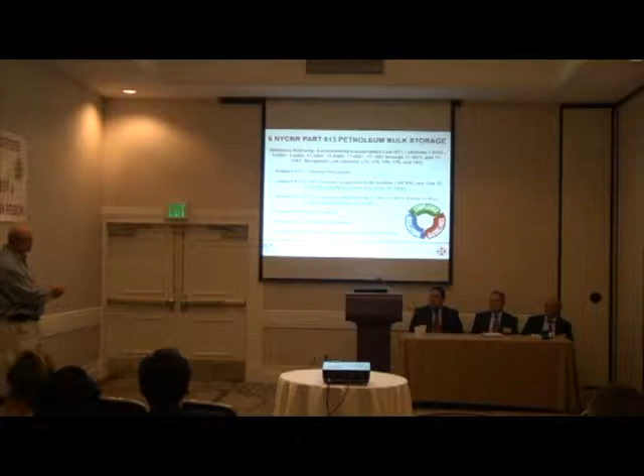The new underground tank regulations, okay, as well as above ground tanks. If you have USTs, whether it's down in a basement or something - I know a lot of you folks are real estate and building owners on a commercial level, so most of what you're dealing with is probably fuel oil. That would be covered under subpart 3, underground storage tanks, subject only to Title 10 of the Environmental Conservation Law. That's New York State law, which oversees the underground heating oil tanks. And then if you have underground storage tank systems, USTs, motor fuels, things like that.

How many people in here have fuel oil tanks? A couple people, I'm sure all you guys do.

So let's talk about some of the problems that you may have with underground tanks. I want to open it up to get some participation. Yes, sir.

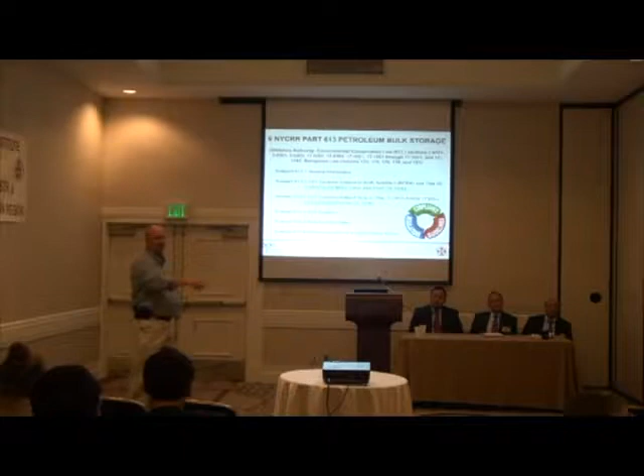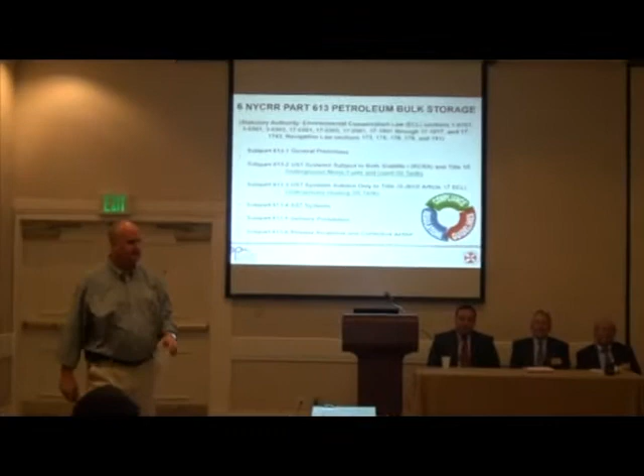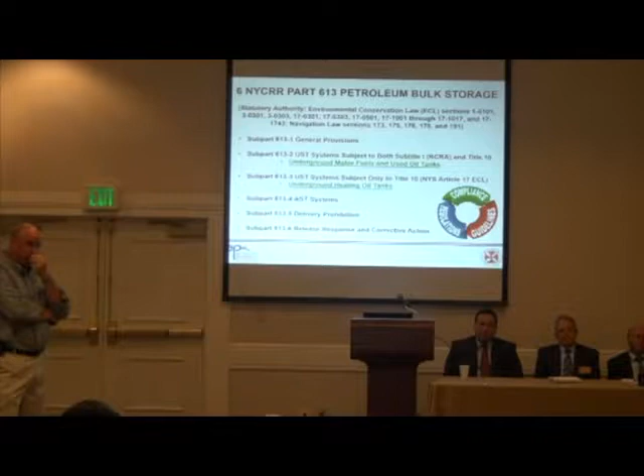I had 1,000 gallons in storage. It was there when I bought my home. I had it taken out of the ground, put in an above ground storage tank in my basement. And when they took it out, they found pitting, and the company that took it out filed a spill report with the county.

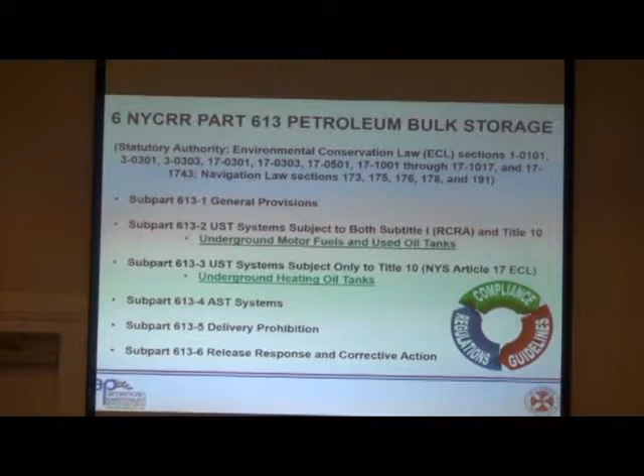Then I had my insurance company come in, and they did all this testing, which was far more extensive than the company that pulled it out. They refuted the company that pulled the tank out, and the insurance company said there's no pollution or contamination here that's significant. They closed the spill report.

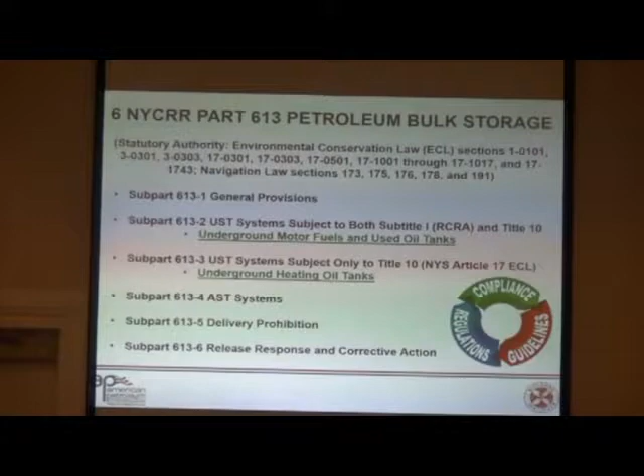It was just so frustrating. But it cost you a lot of money. Well, that was fortunately the insurance company that had to take care of it, because they were concerned about the liability they would get. But it made me feel like some companies pull these things out just to file spill reports so they can get work.

Well, yeah, there are what we like to call bad actors in the industry, and I like to think that we're not bad actors. It wasn't your company - well, better not be. No, I understand, I've heard horror stories. We've been called in to help folks that have had problems with other companies. I'm not going to throw stones at the competition, but there are good companies, and there are, I guess, less than ethical companies that want to create work. Typically, we don't operate this way.

Anybody else have any horror stories? I'll share a few. I recently had one up in Woodstock, New York, up in the beautiful Catskills. Again, it was a homeowner - I'll put some fear into the fuel oil delivery folks here. An above-ground storage tank in a basement was overfilled, and the fuel kept shooting out the vent.

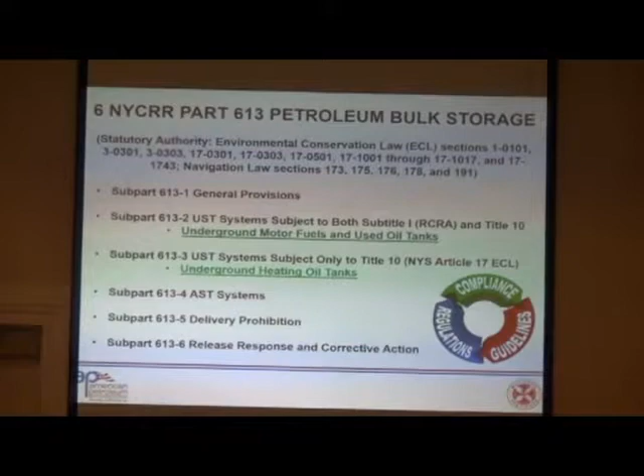Every tank has a fill and a vent, because when you're filling the tank, the air needs to get out to let the fuel go in. The vent was situated right above their drinking water well, so it came shooting out. Obviously poor design to begin with, but the well filled up with oil.

One Saturday morning, I got a frantic call from the homeowner saying that there was fuel oil coming out of her shower head. We immediately went and took care of the issue, closed out the spill with the DEC, and cleaned up the environment. That's one of many, but there are all kinds of horror stories.

I'm dealing with a spill right now in Saugerties, New York, at a retail gasoline facility, where they were not paying attention to their tanks.

The bedrock was very shallow there. They had a line leak and didn't do anything about it. At the gas station, you typically have what's called a pressurized system, with a submersible pump. The lines are always pressurized, so if they leak and you're not paying attention, it's just going to spray that gasoline out all the time.

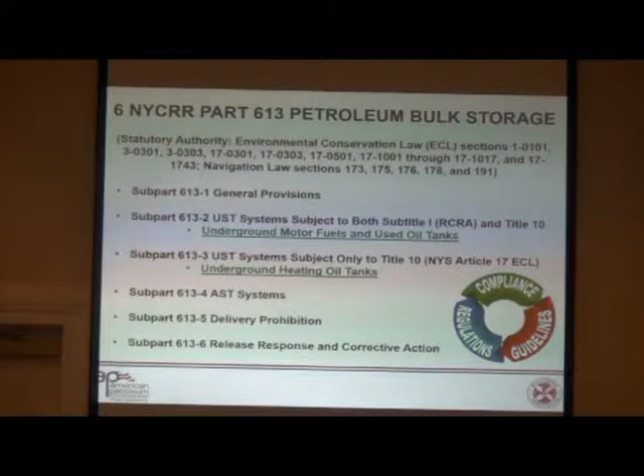It got into the bedrock and contaminated three drinking water wells, two of which are associated with the Comfort Inn hotel. So you had people checking in, going to their room, and they had gasoline in their water, in their shower, and everything else. Those are just a couple examples of what can happen if you don't pay attention to your fuel tanks. Fuel has to stay in the tanks.

I can share a story. The story is interesting because it covers a bunch of items. I managed a property, a large property. Sitting in the office, I get a call: DEC detected a leak. There were people working about a mile away, doing some work in the river, and somehow they traced oil in the water up to this property.

So we immediately called the company to come in and look at it. The building was built in the 50s, and we knew these were original tanks. We constantly took readings, and there was no reason to believe there was any leak. We never registered them, but did all the tests, everything we were supposed to do.

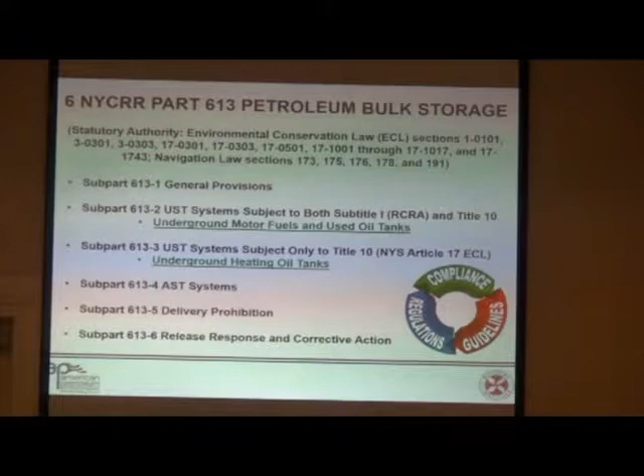We dug out the tank, and it happened to be in bedrock. There was more oil than you could possibly imagine. It seeped into the bedrock, seeped into the ground. We took the tank out, and it was all pinhole leaks. What was determined, even before I was managing the property, was that this tank—a 5,000 or 10,000 gallon tank—was probably leaking for 20 to 30 years. A slow drip.

I don't want to get into all the costs involved and what was involved, but the moral of the story is you can't always trust the readings.

Say now all the tanks are new and they're interstitial. Yeah, I'll explain that—that's a great point. Any tank under the new regulations, actually the previous set of regulations. Backing up a little, DEC really didn't exist until the mid-1980s, and the original set of underground storage tank regulations came out effective December 27th of 1986.

If you install a tank underground in New York now, it has to be double walled. It can't be a single wall tank. You can have a single wall tank, but you have to have a liner or some type of secondary containment underneath it. So any tank you put in the ground now has to be double walled.

Let's talk about regulated tanks versus unregulated tanks. If your tank is less than 1,100 gallons, typically it's not regulated unless it's something weird like waste oil. That's usually the cutoff for having to have a registered facility. I've had homeowners come to me with a 2,000-gallon fuel oil tank, and I asked if it's registered—they have no idea.

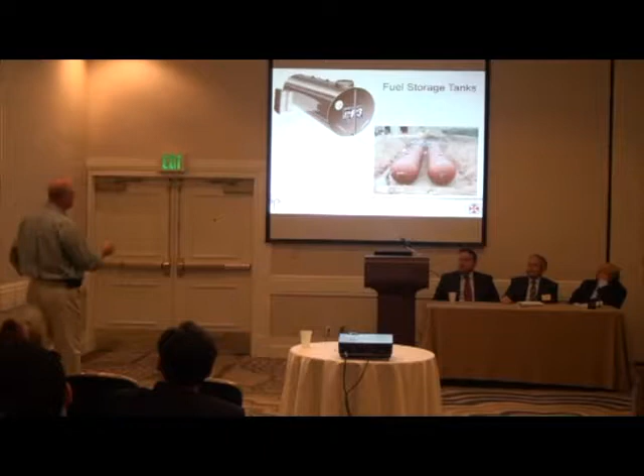But if you notice on the tank, they have these—they're called sacrificial anodes. The tank is cathodically protected. What happens is you put an electrically active metal like magnesium on the tank, and because it's more electrically active, that will tend to rust and rot away over many, many years. Typically they'll warranty a tank like that for 30 years. So over that time, these little hunks of magnesium, these sacrificial anodes, rot away and protect the shell of the tank so it doesn't rust.

Plus you have a double wall, and inside—I'll show you an example of what we do—it's called interstitial leak detection on double-walled underground tanks. But again, fiberglass tanks are generally state-of-the-art now. That's what people typically do.

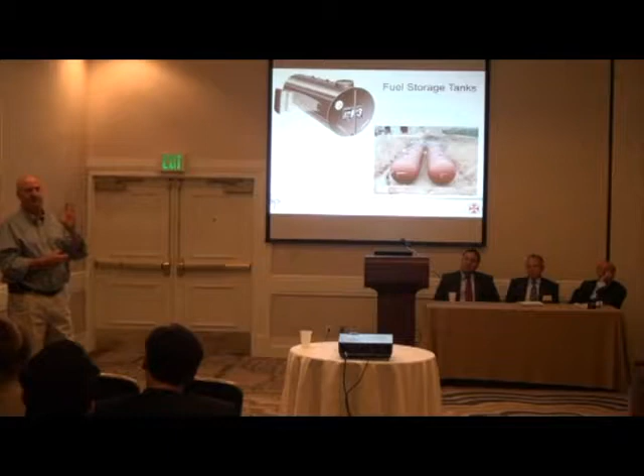So they're state-of-the-art fiberglass? Absolutely. Stainless steel? No. Underground for fuel and petroleum products, the big manufacturers are—these are Xerxes. You can tell by looking—let me go back here—these are Containment Solutions, those are fiberglass tanks as well.

And some of these you can actually get triple wall tanks now. So you can tell the manufacturer just by looking at the color of the tank. Actually, Containment Solutions makes green fiberglass tanks—the green ones are Canadian, made in Canada. These happen to be made in the US. The Xerxes are a red fiberglass. But yes, fiberglass is state-of-the-art now.

Fiberglass tanks, fiberglass piping, flexible piping—we install a lot of that. It's easier to install, the fittings are easier to deal with, and you don't have to be precise on your angles. It makes it easier for the guys when they install. But that's a great question.

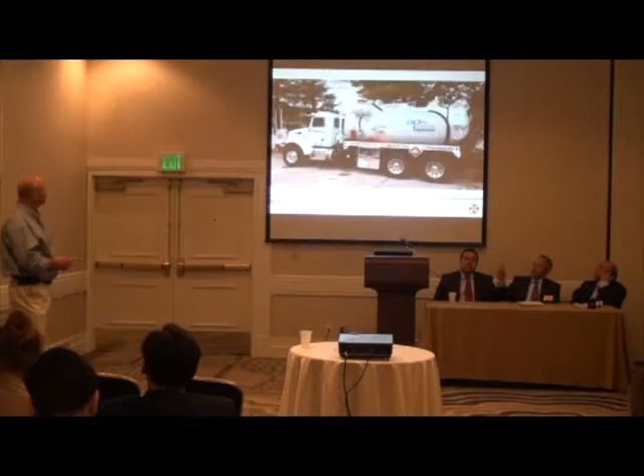That's, Michael, one of the things I think we run into quite a bit—there are a lot of tanks in Westchester County, in buildings built probably in the late 50s, early 60s, underground, that are burning 6-oil. And with the decline in 6-oil, these were very unregulated underground storage tanks—you really didn't have to pressure test them.

And now you're seeing where people are converting and are going to be forced to convert to 2 oil very shortly. And the problem that people are going to have is those tanks probably shouldn't be holding number 2 fuel oil. Right, yeah. And the difference between 6 and 2, people want to know what that is.

6 oil is much more viscous, it's thicker. It's almost sludge. Right, so if it leaks, and asphalt and emulsion products and things like that, they're not as heavily regulated because if the stuff leaks out of the tank, it's not going to go very far. Okay, but that's a great point, absolutely.

And the other factor is, anyone here from Westchester County Department of Health? Can we shut the camera off now? No. You're safe. We're safe.

Having dealt with them on numerous occasions, they're very strong in policing oil tanks. I was going to use the term militant. Militant is another word. And they run a court, basically, where they'll find a violation almost anywhere, quite honestly. Whether you have a super who's not keeping his logs properly, you have to follow all the regulations. If your fill port paint has faded over the winter, that's a problem. If the signage is not 100% correct, that's a problem.

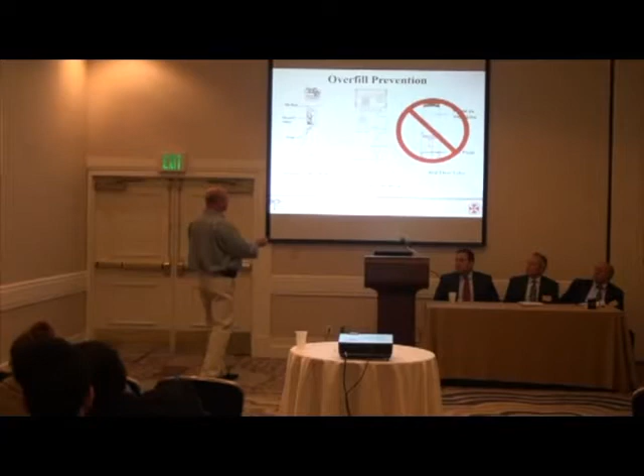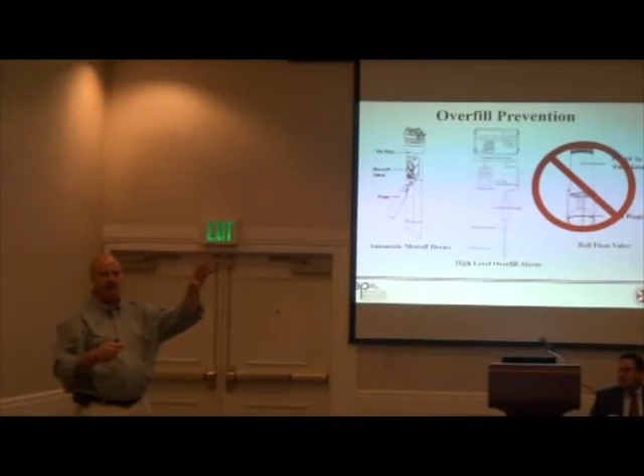Let me blow through a couple of things here too, so we can get done on time. Overfill prevention, automatic shut-off devices. Some of the larger tanks have an automatic tank gauging system. So when the delivery is being made to the underground storage tank, or even an above-ground storage tank, you've got product level float, so when it gets to a certain point, it'll trigger a high-level alarm. It'll be an audible or a visual alarm that basically says the tank is full. Mr. Delivery Guy, stop putting fuel in the tank. This would be an automatic tank gauge, automatic shut-off devices.

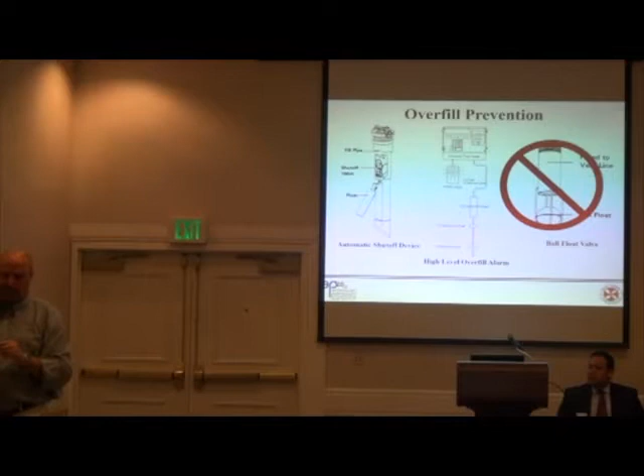I know Westchester County requires, particularly for above-ground storage tanks, some type of mechanical overfill prevention. So if you're putting fuel into a tank, there's going to be something that restricts the flow and actually prevents the fuel from getting in there, as opposed to filling the tank up and just having an alarm go off and not stop the flow, just telling you that it's there. One important thing, this is part of the new regulations. It actually came down from the Fed, so I get the circle and slash through here.

Ball floats. Typically they're on a vent line, ball float. As the liquid level rises and the air is coming out of the tank to allow the fuel to go in, the ball will actually get jammed up in that cage, and it will restrict the flow of air out of the tank. And what that does is put pressure on the delivery hose, and it allows the driver to realize that the tank is filled.

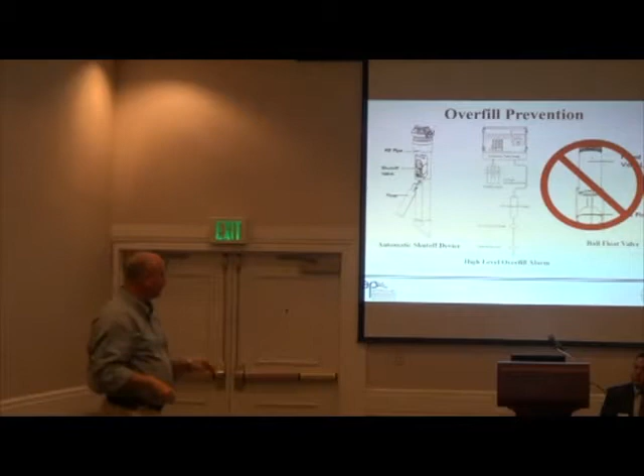He's got to stop doing it, but they're more problems than they're worth. So if you have them, they're legal right now, but you cannot install new ones, and you can't replace old ones. So when they're done, they're done. You have to go to another method of overfill prevention.

How many problems have you had with the OPV on the left? The flapper valve? Yeah. They function. They do pretty well. Usually they're used at a retail facility, but you have people that do tricky things like drop in tank sticks to override them. I got fined $30,000 in New Jersey for doing that. Because I've had customers here in Westchester, the county made them put that in, and then they jam up.

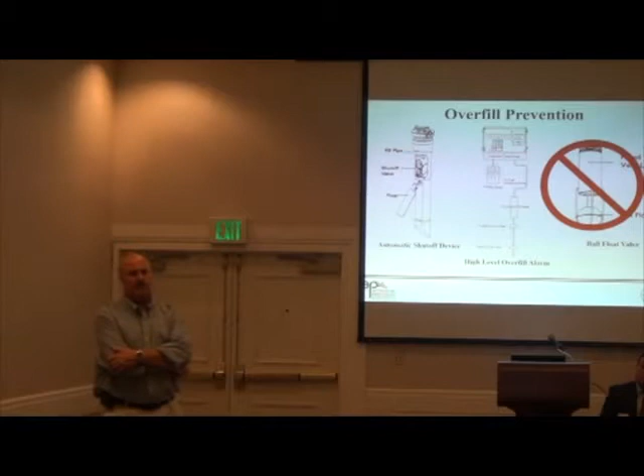Yeah, but what type of delivery? Gravity or pressurized? They don't work for pressurized deliveries. That's for number two oil delivery, yes. Yeah, that could be the problem. You need to know. Yeah, well, somebody with the scientific expertise needs to tell the county to stop making pressurized delivery. Just blow right past that thing. That's right. It's a pain in the neck, but they work fine for gravity.

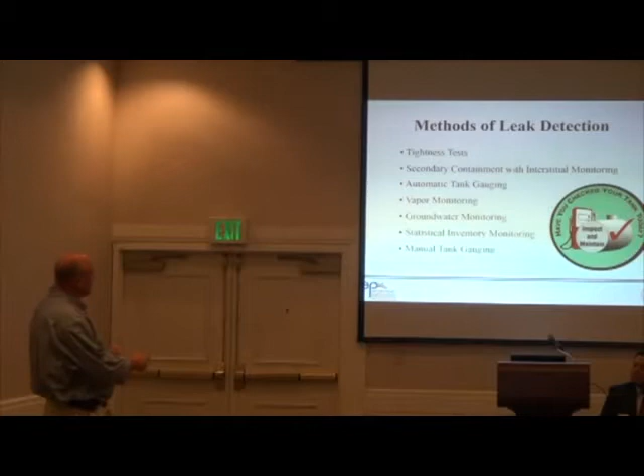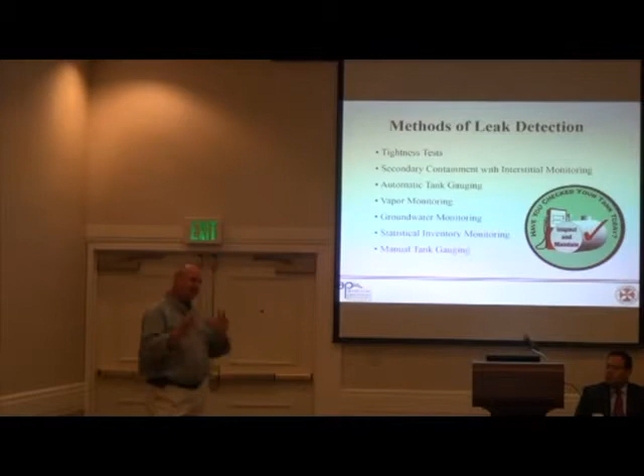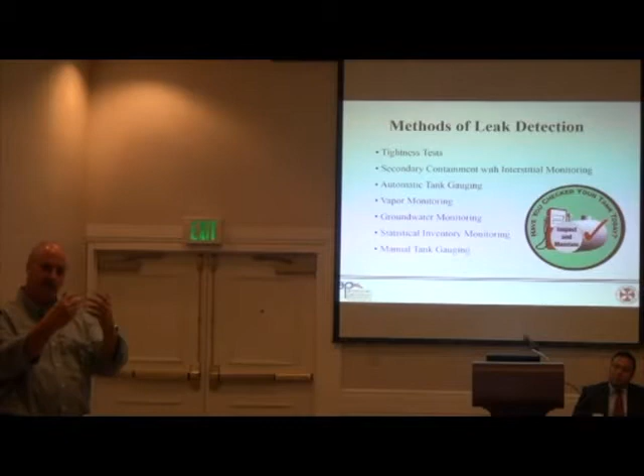All right. So methods of leak detection, again, tightness tests, secondary containment with interstitial monitoring. I'm going to show you a picture of that here in a little bit. Automatic tank gauging, vapor and groundwater monitoring. Those are pretty much out the window, because if you're monitoring vapors in the soil or monitoring groundwater to see if there's hydrocarbons or gasoline or fuel oil in the groundwater, it's too late at that point. It's already out of the tank. All right, so we want to be proactive instead of reactive. So those are kind of out the window.

Statistical inventory monitoring, that's actually now acceptable in New York State, and manual tank gauging. Here's what we were talking about earlier with the interstitial electronic leak detection. This is your double wall tank. This is just a cutaway of it. You have your inner wall here, and you have your outer wall down here. Your fuel is on the inside. What the interstitial electronic leak detection allows you to do is, it's actually a little mechanical switch that sits right down at the bottom of the tank.

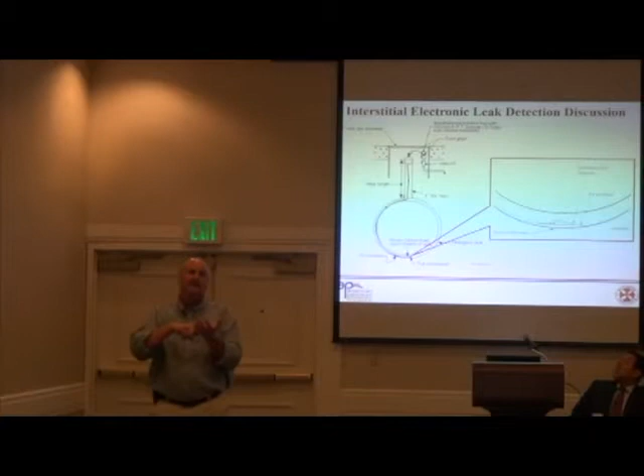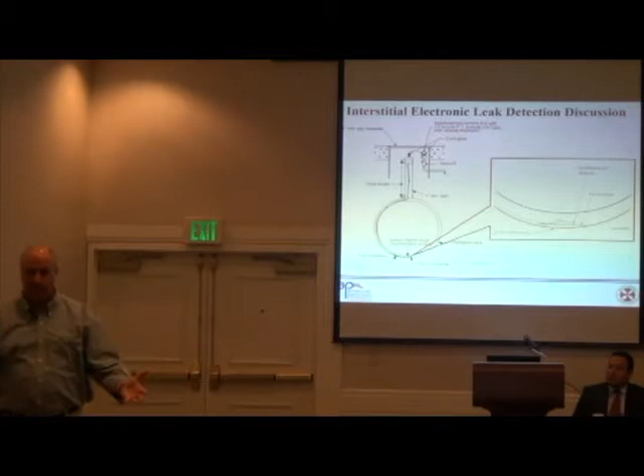And our guys, there's a string that goes through that. They tie the sensor to it and they pull it all the way through. When it gets to the bottom, there's a little red dot in the string, so they know it's exactly at 6 o'clock on the tank. And that's connected through wires to your automatic tank gauge. So if any liquid, whether it's water or fuel, gets in there, it sets off the sensor, and your automatic tank gauge goes into alarm, and it notifies the person that there's a problem with the tank. So somebody needs to come out and take a look at it, try to find out what the problem is. So that's what interstitial electronic leak detection is.

One other thing I recommend that people do is you need to have some type of a facility response plan. Okay, particularly if you got a large apartment building or something, the people that manage it, whether it's an organization, you got 90 properties, you got 500 properties, whatever your case is, you need to have some type of plan to address the oh shit situations. What do we do now?

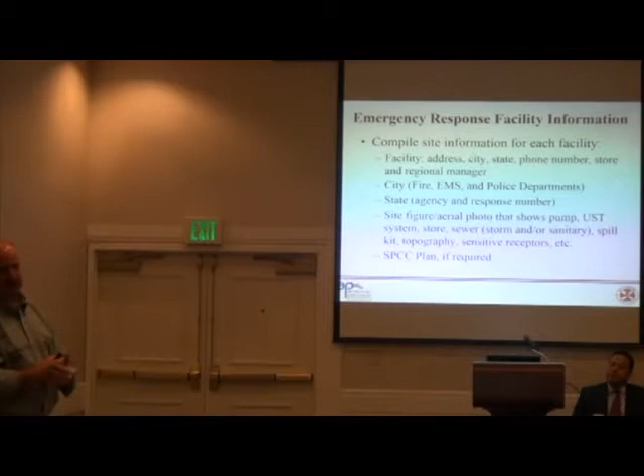A lot of folks, if you have greater than 1,320 gallons of storage in an above ground situation, the federal government requires that you have what's called an SPCC plan. It's a spill prevention, control and countermeasures plan. And that's a requirement for certain facilities. If you have greater than 40 or 42,000 gallons of underground storage, you need an SPCC plan as well. So that's something you should look into. Excuse me.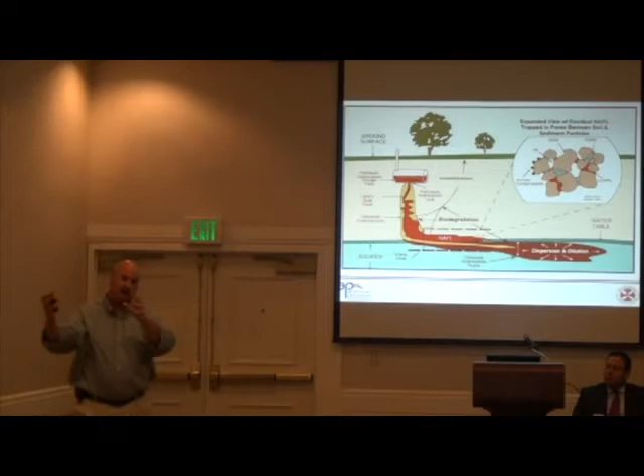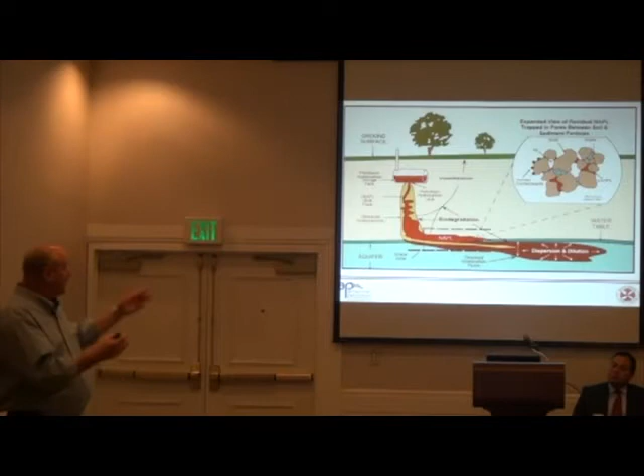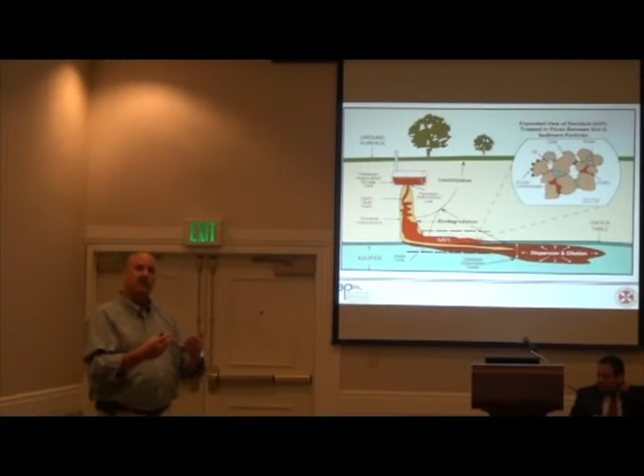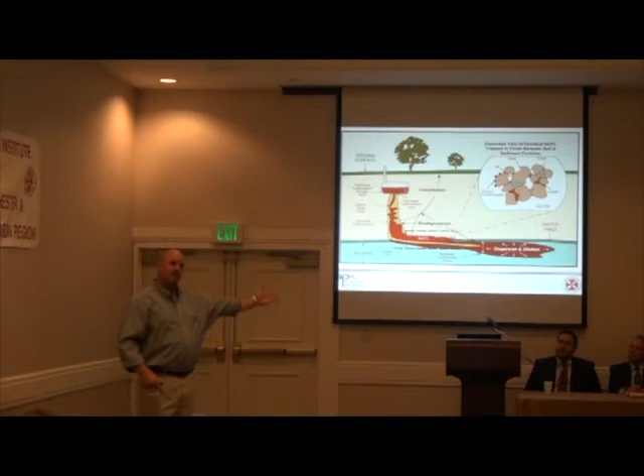That's what we do after there's a spill. We as scientists go out and do soil and groundwater investigations, poke holes in the ground. We collect soil samples and groundwater samples, send them off to a laboratory to be analyzed. We can also do dissolved hydrocarbon distribution maps to give you an idea where the plume is, the areal extent of it. We can also do groundwater contour maps to tell you which way the groundwater is flowing, so you can look at potential sensitive receptors—am I going to impact the daycare center across the street with a well, or is it going in the other direction? Those are some of the things that we do.

But you don't want to get into a situation like this. One other thing I'll say about this too...

Gasoline and fuel oil—gasoline more so than fuel oil—are volatile liquids. What does volatile mean? It likes to evaporate, right? So if you have a spill, whether it's gasoline or fuel oil, that material, if exposed to the atmosphere, a certain portion of it is going to evaporate. And what happens underground? Guess what—the same thing happens. It evaporates and works its way up through the pore space of the soil particles, and it can enter buildings.

And you can have vapors. I've done this way too many times, where you have to put in blowers and fans, put a vacuum on someone's house or positive pressure on it, to prevent those vapors from coming into the building. That's a real serious health threat that the DEC and regulatory agencies, like the New York State Department of Health, are focusing on these days.

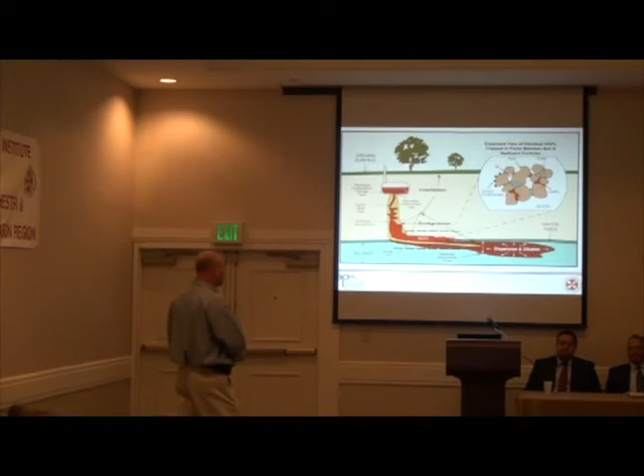So don't have a spill. Pay attention to your tanks. If you don't know what's going on, call somebody in to help you out. It's really kind of the moral of the story. Unless you guys want to add anything, we're pretty much right on time. Any questions on anything at all?

Just one thing, more of a statement. I know you've been addressing buried tanks, but one of the revisions is the definition of the UST—being any tank that is in a basement, really above ground, but covered with a material or buried 10%, is now considered a UST, which falls under a lot of the codes, 613, that you've been addressing. A lot of people don't know that. So I just wanted to put that out because I'm not sure who the audience is, but that's something really important.

When I worked for Original Energy, Robeson, I started a program where I actually do inspections and write reports. I've dug into the code real deep, and it's pretty, you know, all over the place. I've done close to 80 reports now, and I've addressed a lot of similar issues. Some, of course, are different, but people need to know about the placards, and they need to know about fill port labeling and all the other stuff.